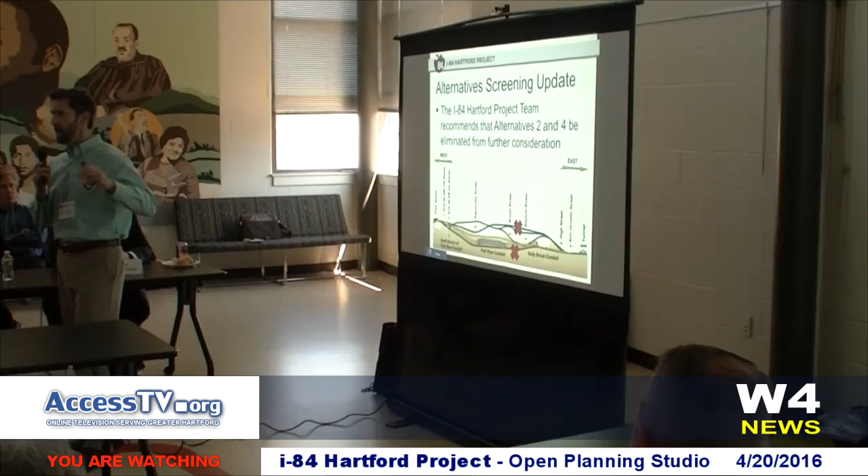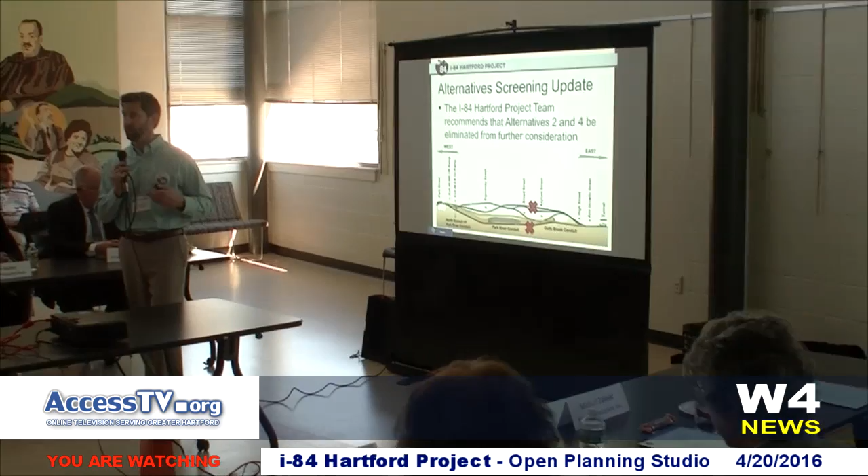So where are we on the screening? Well, we continue, and we've told you now for the last several months, that we really believe alternative 2, the elevated highway, and alternative 4, the tunnel, have some real challenges to implementation. We feel alternative 2 doesn't really satisfy a lot of the needs — I mean, it does replace the bridges, but it does not really solve our congestion and safety issues that we would really like.

Plus, it maintains structures that would have to be maintained over time, which is another issue that we're not thrilled about. The tunnel, quite frankly, ends up just being incredibly expensive. So our recommendation at this point is to remove them from further consideration.

I think we've been saying that, but it's a high-level decision. It's not our decision to make. We're basing that on our technical analysis. Federal Highway Administration needs to concur with that, as does the governor and commissioner, and those are discussions that are all ongoing.

I think alternative 2 actually may need to stay on the table. It depends, but it is the alternative that has the fewest property and building impacts. So we have to recognize if that's a big barrier to implementation, that's one that still may need to remain on the table. However, it's not a preferred alternative for all the other measures that we're looking at.

So the timing of this decision is a little bit to be determined. We know that it's in conversation, and it could happen in a week or a month, a few months. We're not sure yet. Again, it's very high level, and a lot of parties have to sort of come to that agreement together.

But what do we think we can do? Well, clearly we can continue working on this lowered highway alternative. We haven't had any real objection to this. Most people feel like it addresses a lot of the goals, objectives and purposes of the project. But there still needs to be work done, and we're continuing to refine. And we talked to you about capping options, and those are still possibilities. So those are things — various segments of the lowered highway, can they be sort of tunneled in effect? And that's something we're going to continue to explore.

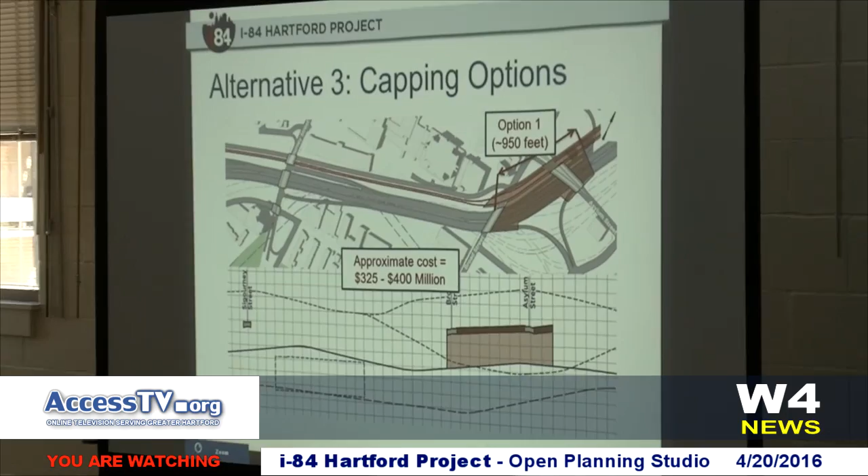Dave, Tim, do either of you want to go through this? There's a little bit of a recap from what we talked about last time, but there's also some new ideas we want to share with you.

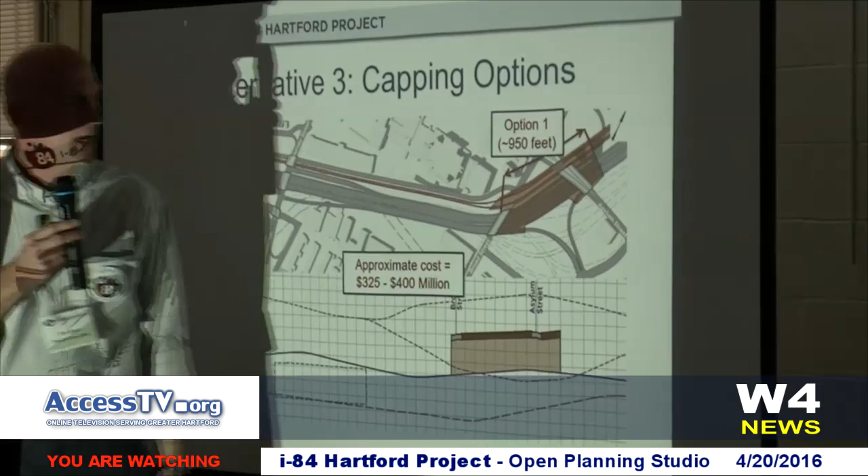So we introduced this capped section at the last PAC meeting. I know we always present a lot of information, so sometimes you need a refresher. We always talked about the connections north-south and how important they are, and also east-to-west, from the Asylum Hill area down into downtown—that's always been critical to the project, really trying to enhance those north-south connections.

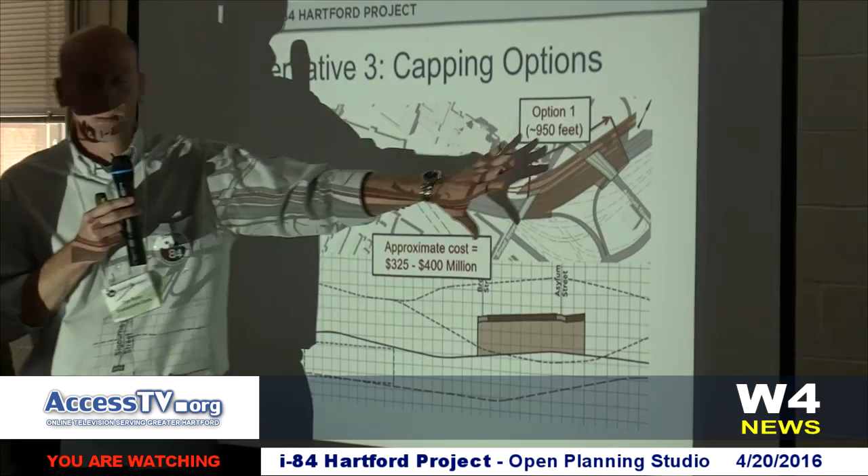So this is an area where we think a cap makes a lot of sense. This is one segment right here—about 1,000 feet and about $300 to $400 million for that one cap section.

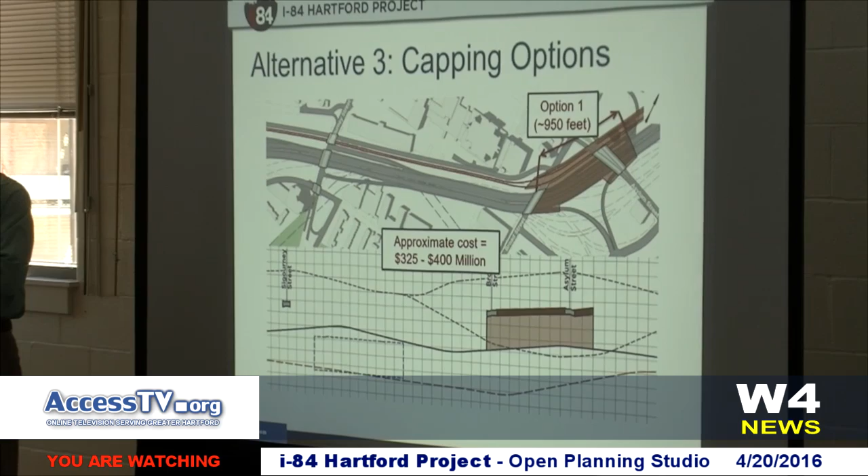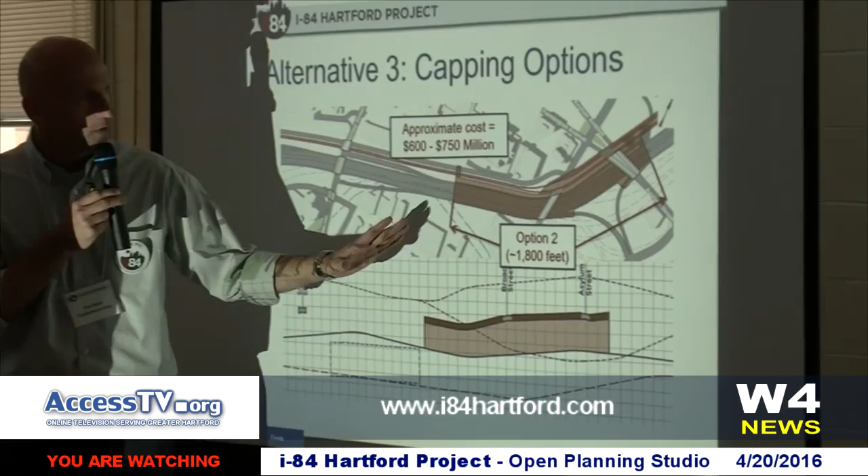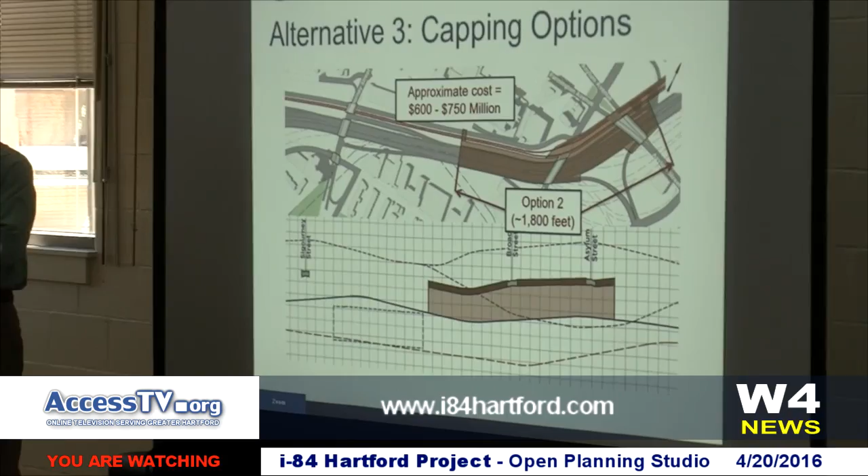Then we took it a step further and started inching towards the west to see what other possibilities were. So for this scenario, we have the original cap, and then a second cap that goes towards the Park River conduit—the longest cap we could put on the west without impacting the conduit. We've done research and know relocating it could be difficult, challenging permitting-wise, and there are other structural challenges. So this would be one other section, combined now at $600 to $750 million.

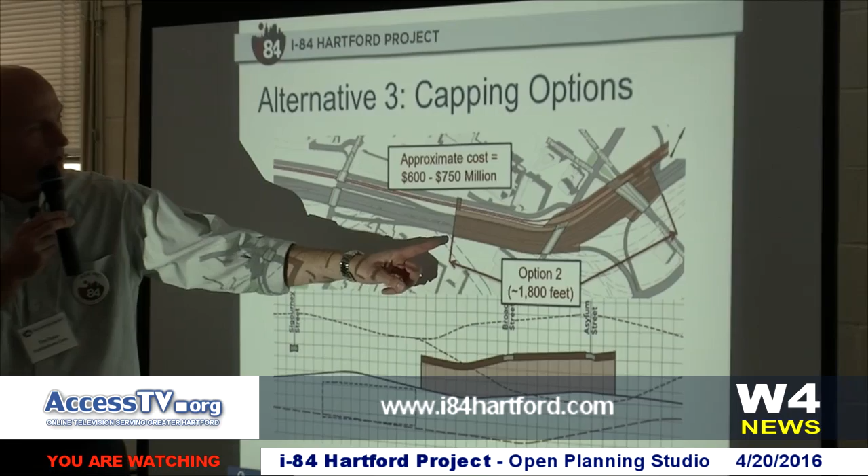And then what north-south connection do you gain? Possibly you could have a connection over the railroad tracks and then go down to Flower Street. We presented this to Aetna a couple of weeks ago. So that's one more iteration.

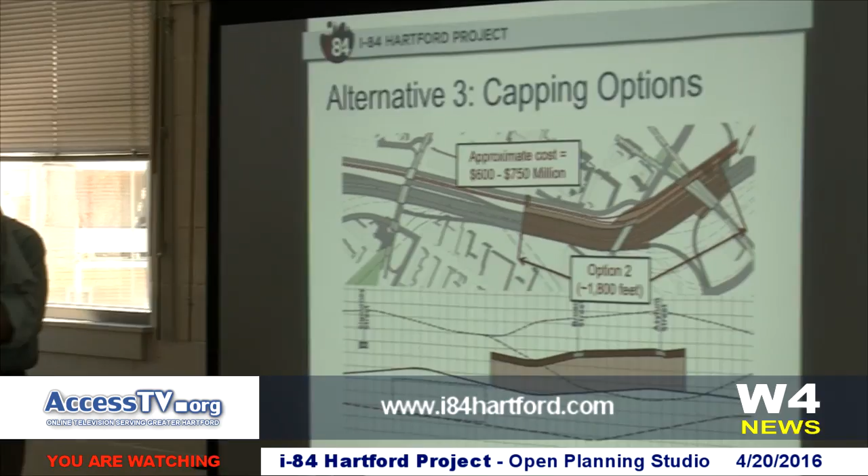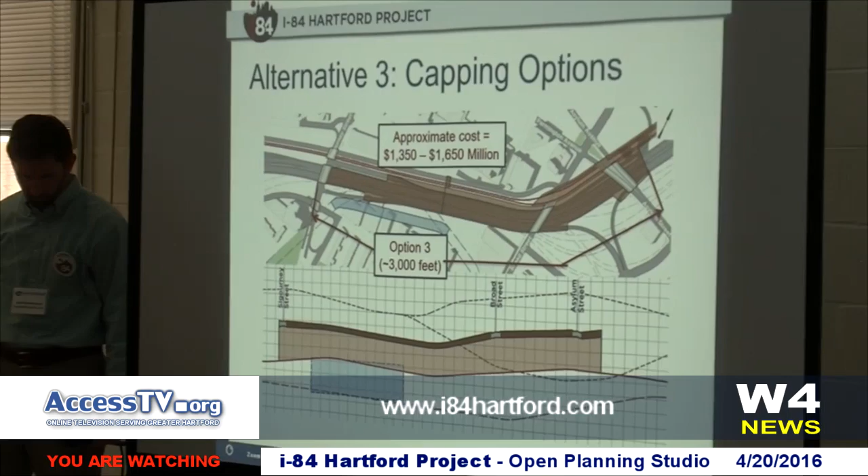And then taking it all the way to Sigourney Street, now you have this nice east-west connection all the way to Sigourney. We know there's a bike path on Sigourney that we could connect to—some kind of linear, off-road connection that's not there today. But the anticipated costs are 1.3 to 1.6 billion now, because we're capping over the entire highway—it's a lot of structure, and it would be in somewhat of a raised section.

So then taking that from Sigourney Street going west, we were asked to look at options west of Sigourney—could that be capped, what would that look like—and we started to lay that out. So now we have a section, this would be Laurel Street. This is with the lowered highway alternative, one of our options on the west, from Laurel Street to Sigourney. Yes, we could structurally put a cap over the highway—that's something we can do.

And then we started to look at some benefits, and we need to discuss that more, maybe with the urban design working groups and the ped-bike working groups, to see what the value is of that one. So about 250 to 300 million.

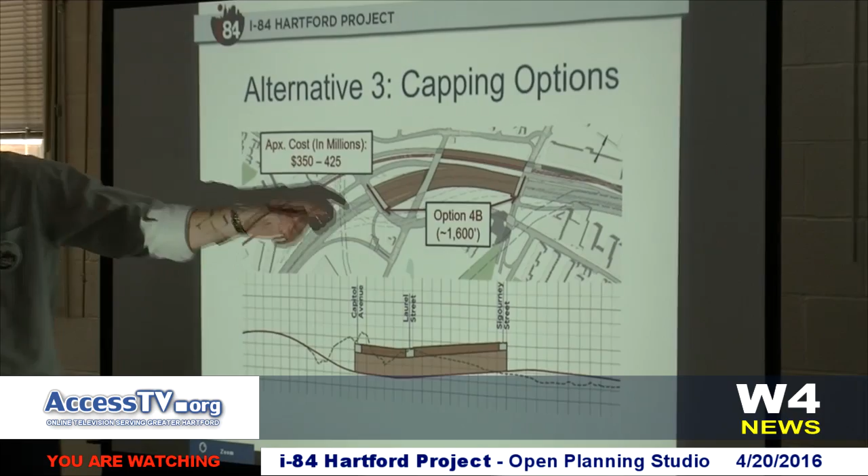And then the last segment is from Laurel Street, this relocated Capitol—Laurel Street would be above, Sigourney would be above, Capitol would be above, so you could connect those. But now the issue is it would be sticking up out of the ground, not at ground level, so there'd be almost a wall there with the cap section to support the deck—basically you're building a bridge above ground, a very long bridge.

So we just started to look at this, and we'll have more. We'll add to it and research more, but this is just some possibilities.

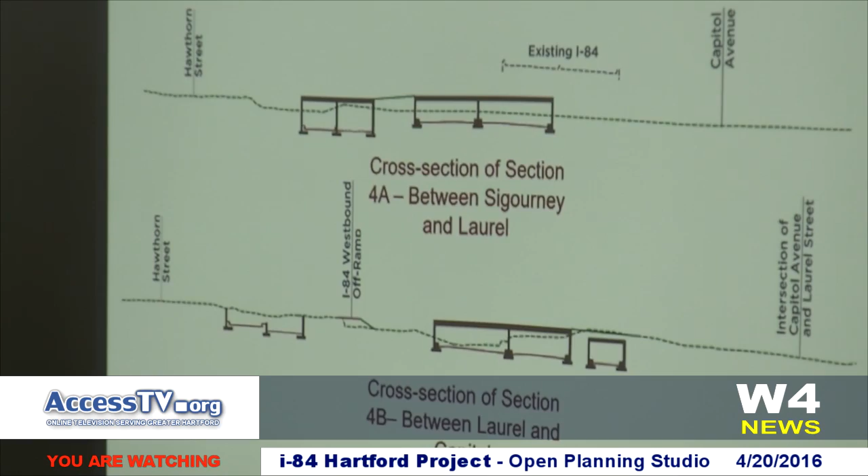So why were we even looking at this in the first place? Well, again, to try to achieve many of the benefits of the tunnel without the really extreme cost.

We felt that we do need a better east-west connection through the corridor. Right now, that's pretty limited. This is a good way of really integrating all of the various urban design features: land, development, open space, environment, kind of contributing positively to the economic health of the city. That's obviously something that's very important at the city level. And of course, shielding the highway noise and the sight of the highway from the neighborhoods.

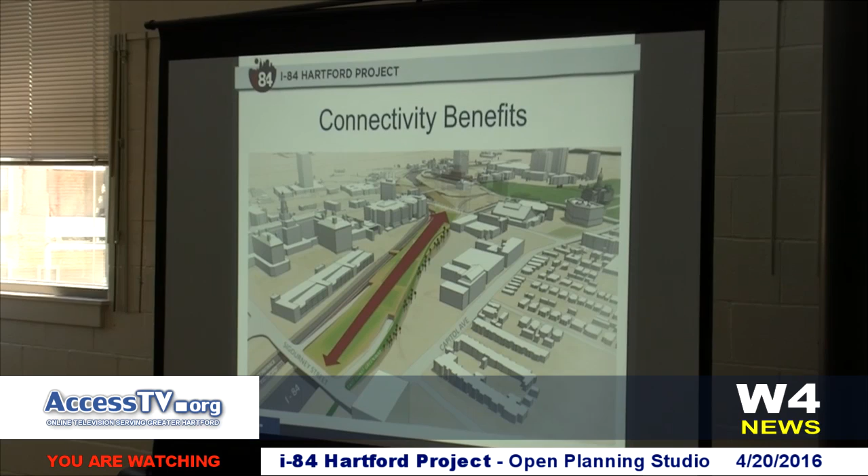So what are the benefits? This is exactly the kind of thing we're still trying to assess. We're truly trying to understand, does this give everybody what they want? Largely, it's an east-west connection. We've had discussions with the city and many people, and we're sort of still amazed how many people really feel as if this cap is going to give people free access across the highway.

We have to remember there's a railroad and there's a bus rapid transit facility there. So there's still a trench. There's private property on both sides. This isn't going to be a real easy thing to cross.

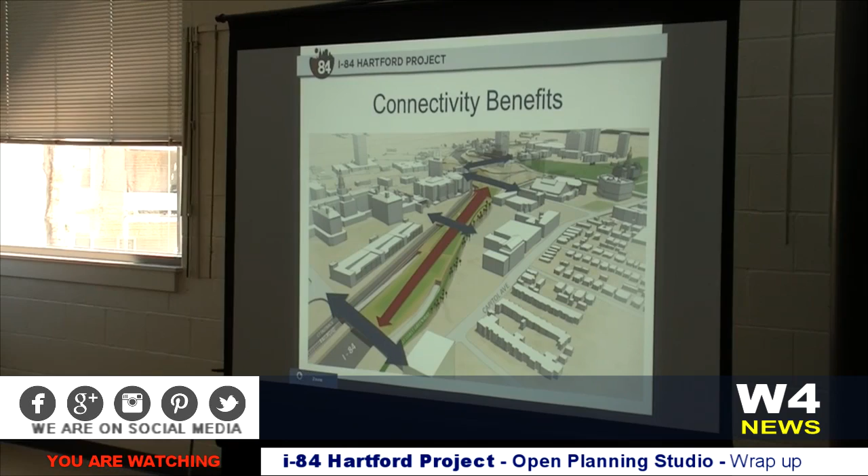The crossings largely occur where they currently exist—that's Sigourney Street, Broad, Asylum. Those are the existing cross streets that you drive and walk through each day. We have an opportunity to rebuild these wider, better, so they don't feel like just auto bridges. That's something we're going to be working on over the next several months to really show you how those could look and feel.

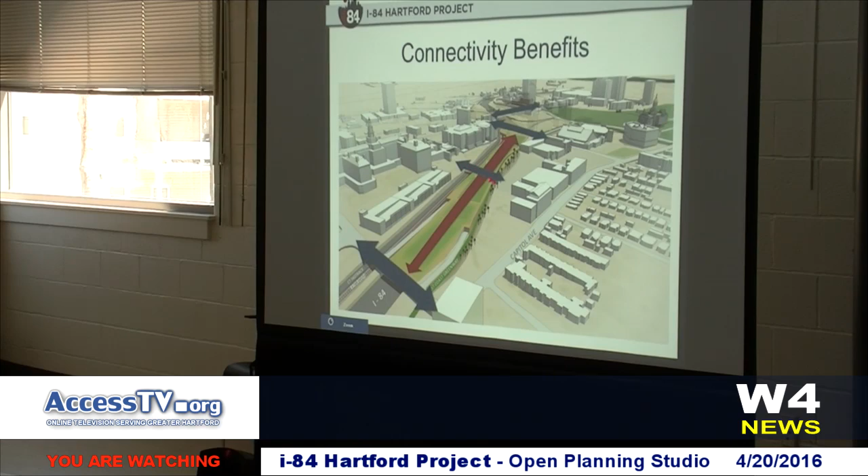But it does give us an opportunity to maybe, as Tim said, bridge this area across from the Aetna campus, bring people to Flower Street, improve those connections. So it's largely an east-west connection. I just want everybody to remember that, because I think a lot of us forget that there's still a significant barrier to crossing and connecting north-south neighborhoods.

Still expensive—$400,000 a foot. You think about that, every foot's $400,000. It's a lot of money. We're still looking at the benefit-cost ratios to see what makes sense, because of those five different segments Tim showed you, some of those probably do make sense from a benefit-cost perspective. Some of them maybe don't.

If we have to move the conduit, for example, it's going to be incredibly expensive. And what do we get for it? That's really what we're trying to ascertain.

So we're asking ourselves, are there other ways to minimize the highway's impact? We know, and we've been saying this since back at the Hub study, that the section between Broad and Asylum is really probably the piece that gives you the biggest bang for the buck. It connects the Asylum Hill and downtown areas. It's a limited cap, but it has some real air rights development opportunities. We've shared that stuff with you in the past. So that's probably something we would really like to continue to work on in the project.

We're just trying to see if those other segments have as much impact. The rest of it—what could it be? Early on there were some visions of economic development, townhouses, other types of buildings. Likely that cap wouldn't be developed in a way that would support structure. Air rights development is incredibly expensive to build. There's probably not a market here in Hartford for that. It would be a very, very long-term prospect.

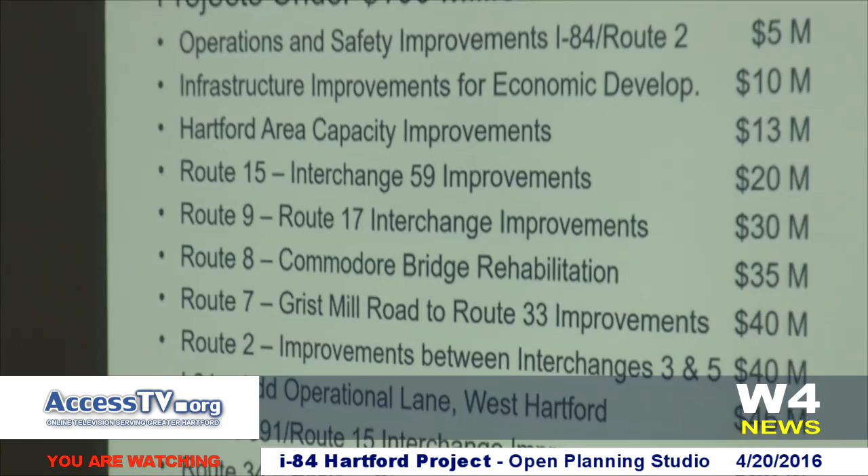Let's Go Connecticut, which is the state strategic plan, has a lot of unfunded needs. What you think $1.5 billion could actually buy in terms of strengthening our transportation system statewide is really impressive. These are all the projects under $100 million that the governor would like to fund, but unless the state comes up with the money, are probably going to go unfunded.

Between $100 million and $1 billion, again, a dozen or so projects. And you can see, when you talk about transportation and our ability to move goods and people, these are important projects—interchanges, missing links in the state highway system.

Here's several more. And then there's the mega projects, the ones that are over $1 billion. Ours is on there—again, this isn't a project that's funded at this point. We have Waterbury, the Mixmaster, which has significant problems—$7 billion, even bigger project. So there's a lot of needs out there. And we have to put that all into perspective when we think, is $1.5 billion something we want to spend on a cap?

So we continue to ask ourselves, are there alternatives to capping? We know there's partial capping opportunities, we just shared that. Can we do the same thing with noise or visual walls to block the highway's impact? Landscaping, berms, vegetation. And the latest thinking is, what can we accomplish with this East Coast Greenway, this linear pathway we've been talking about? Can we achieve some of the same benefits with that?

I'm going to let Mitch actually talk to you about this piece because some of this material I don't think many of you have seen yet.

Thanks, Mike. So this work, the ideas that I'm going to show you literally started on February 26th, the day after the last PAC meeting. Thinking about how we can make east-west connections through the city, connect neighborhoods, screen the highway, in a cost-effective way, but also appropriately scaled and achieving the goals of a tunnel and a cap. So these are still very new ideas. We're excited to share them with you today and look forward to your feedback on them.

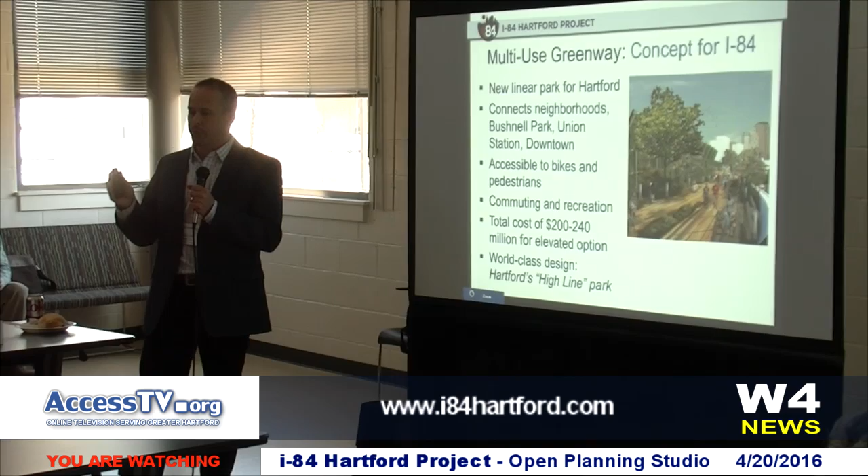Initial cost, order of magnitude cost estimate for this from Bushnell Park to Sisson Avenue is about $200 to $240 million, and that would be in the elevated option.

So what I'm about to show you are a couple different scenarios of how this greenway could work through the corridor. One is elevated, and one is at grade.

And lastly, what I think is important to impress is that we're really seeing this as world-class design. A lot of people have talked about the High Line in New York City as kind of a landmark project, a landmark public space project for the city. We think that this should be particular to Hartford if this is the direction that's chosen, but that the design quality of it should be to that level, to be that standard of high quality design.

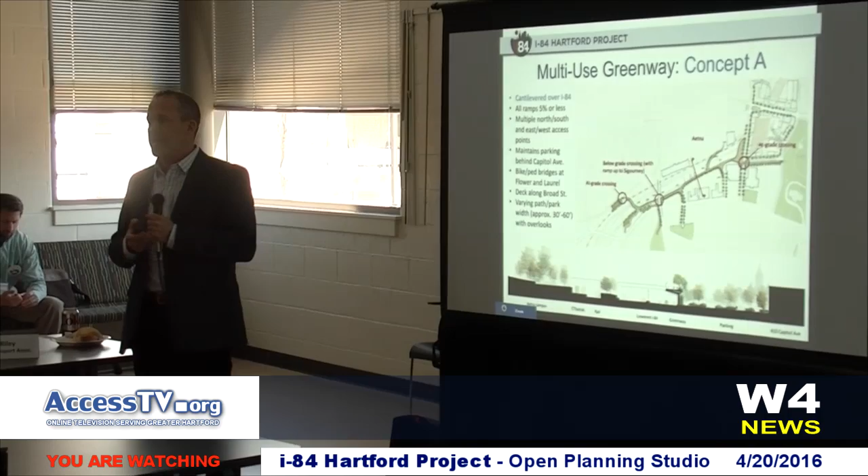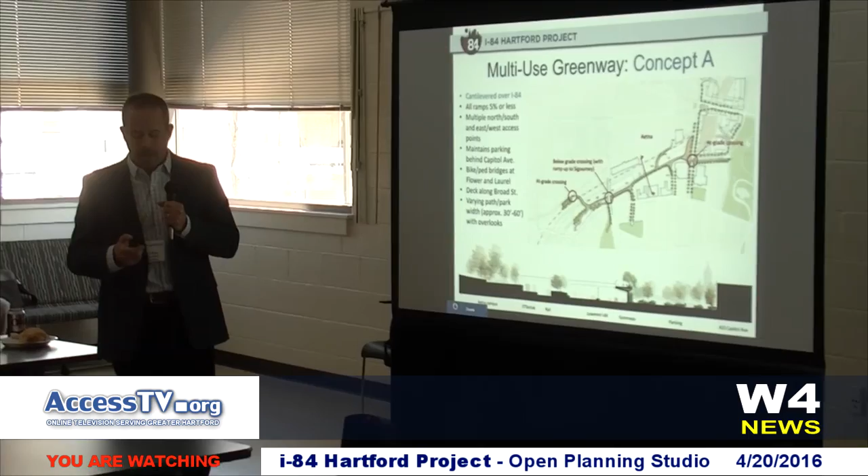I'm going to show you three concepts, A, B, and C, and these are also on the boards off to the side there. And again, this is really just showing the piece between Bushnell Park and Laurel here. To the left, it would extend all the way to Sisson Avenue.

But what this shows is an elevated greenway that begins here, the deck on Broad Street, and really the capped area between Asylum and Broad. So in each of these scenarios, you'll see that the cap is included at Asylum and Broad, which then flows into an elevated greenway system between Broad and Sigourney.

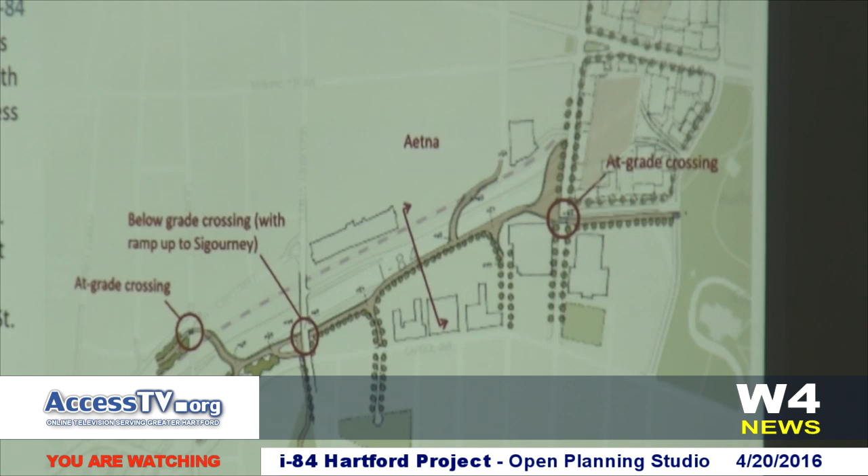And it would be alongside I-84, elevated. You can see in the section here at the bottom, in this scenario, it's cantilevered over the highway lanes, over the eastbound highway lanes. Really an elevated park. It would make connections to Aetna to the north and Flower Street to the south, so that Flower Street connection could be put back in some kind of way, shape, or form with a ramping system that goes up to the greenway, over the highway, and then to Aetna and Flower Street on the other side.

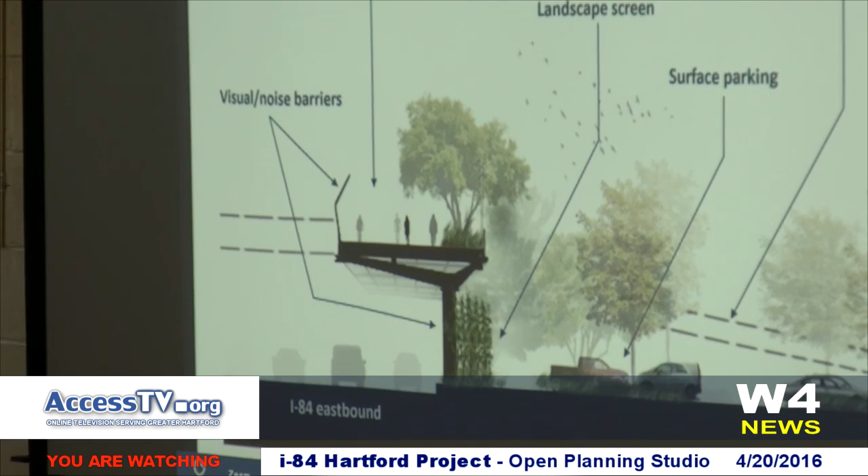This is a zoom in of the section of what that would look like. Importantly, what you're seeing here is the elevated greenway above the highway, but what's also here, integrated within the column structure of this greenway, would be a screen wall. And that screen wall could have landscape with it. It could be a number of different things. We really haven't gotten that far with the design of that piece. But what that does is it would screen the highway from street level along Capitol Avenue.

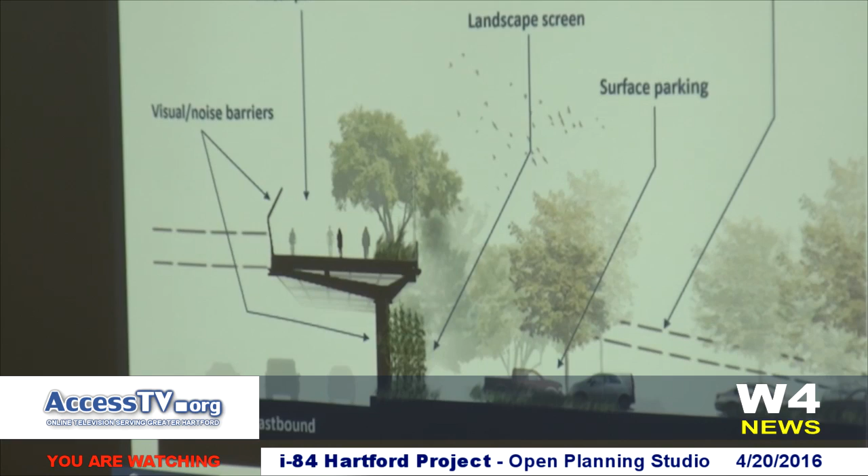So if you're standing on Capitol Avenue looking towards I-84 to the north, you would see this elevated greenway. You'd see wall and landscaping. You'd basically see an elevated park in your view. And we have a perspective of what that looks like in a second. You can see the ramp dashed in down to Flower Street here, 5% ramp coming down to Flower Street, and then the ramp crossing the highway and going towards Aetna and Flower Street to the north.

This is concept B. It's basically the same concept of an elevated greenway, just slightly pushed to the south of the highway. You can see it here with a double structure and the zoom in of that section, again with the wall, visual barrier, noise barrier, underneath the elevated park, which is up here on top, ramps down to Flower Street and across the highway as well.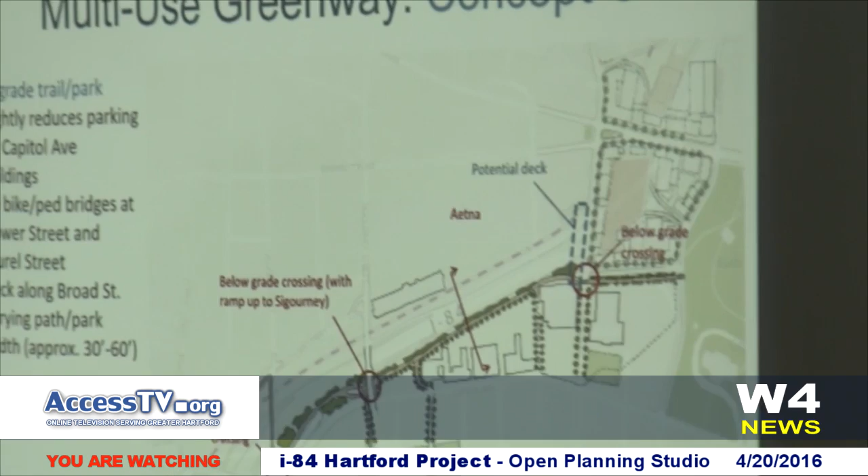And then concept C, we looked at how could the greenway work if it were at grade, on the ground, just coming through the parking lot, behind the Courant, into Bushnell Park, and extending to the west along Laurel Street. In all of these scenarios, we're talking about a width of probably 30 to 60 feet in terms of the linear park, and it varies depending on the condition it's going through in the urban environment.

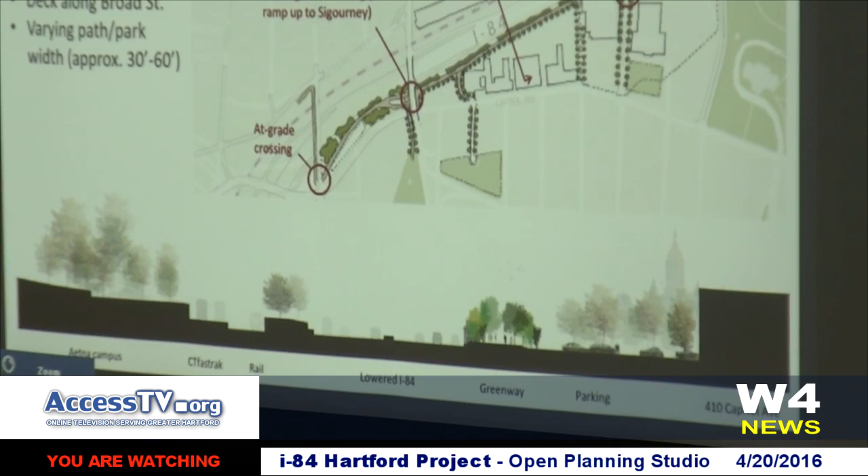This is a section of the at-grade park, again with the screen wall and landscape surrounding it.

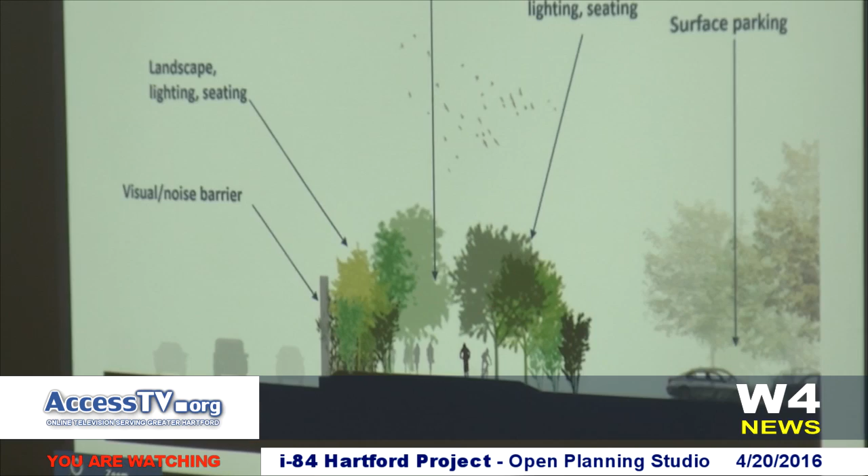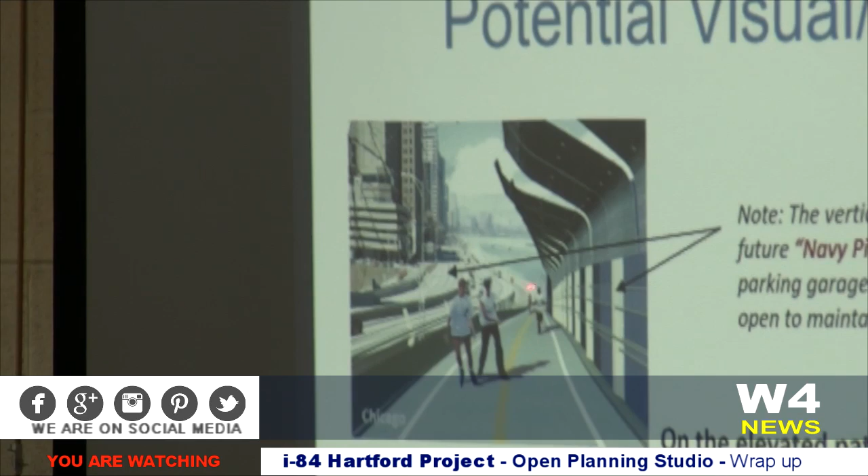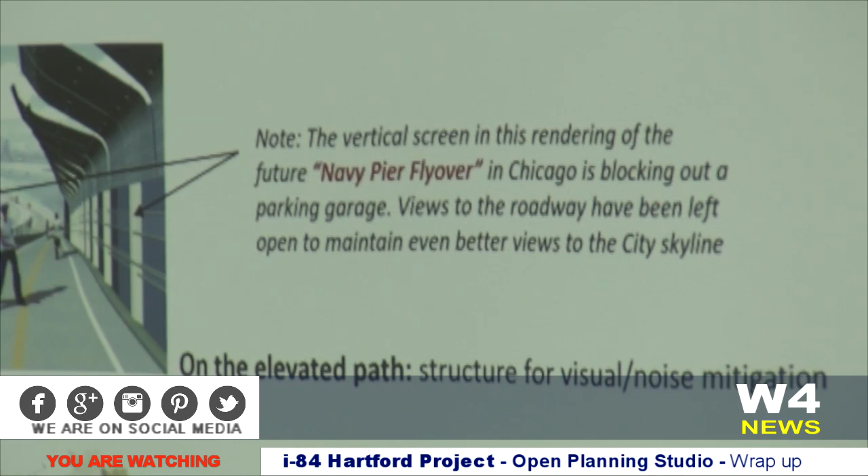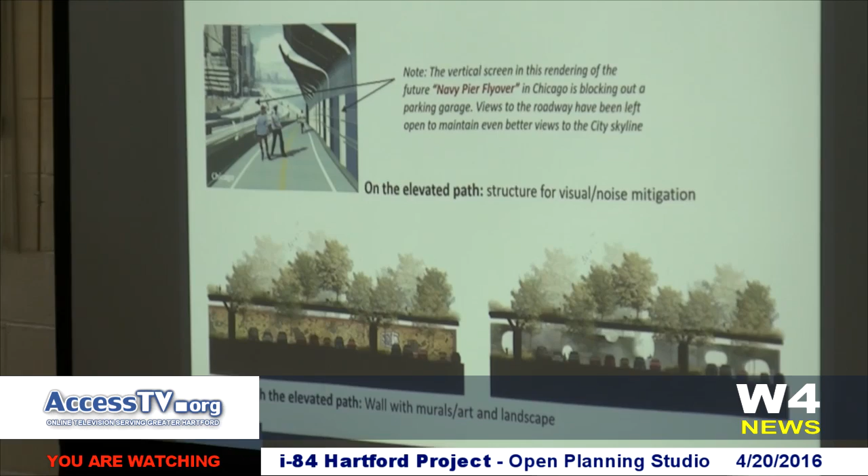We looked at some precedents, and we also gave some thought to how that wall could function underneath the elevated greenway. This is actually a project in Chicago that we found, called the Navy Pier Flyover, alongside Lakeshore Drive. This has similarities to what we're talking about. It's not exactly the same kind of context, but you can see this is primarily a bike path. There's no sort of park or landscape elements to it, places to sit. This is a way to get cyclists from one side of the Chicago River to the other side. But what we thought was interesting here is the kinds of treatments they're thinking of in terms of screening parking decks, screening highway, and screening noise. So we were intrigued by that image and did some testing of our own of what that could look like in Hartford.

This is the view that I mentioned before, as if you were standing at the intersection of Capitol and Broad Street as a pedestrian. You've got the parking lot of the Courant in front of you, and you're looking towards the Aetna building here. This is Flower Street, and this is the ramp that would go up to the greenway, the multi-use greenway, East Coast Greenway. And this would be the greenway itself, this yellow line coming through on structure with a green wall, landscape, and other types of treatment that would block out the highway behind it, because the highway behind it is now at grade.

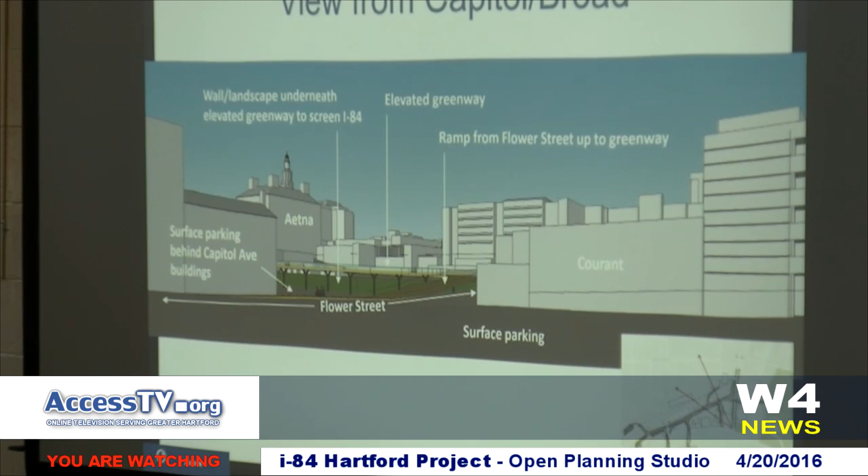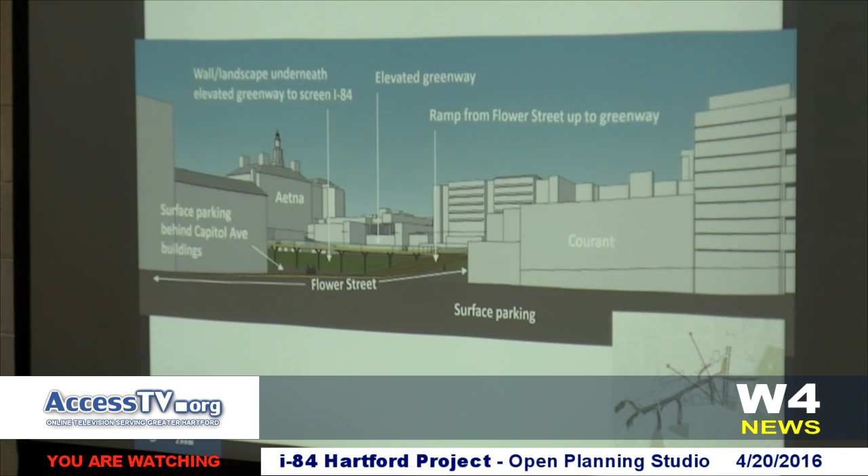This is the lowered highway option. One other thing to point out about this diagram is that the East Coast Greenway, or multi-use greenway, would not be strictly flat. It would actually have some up and down movement to it to relate to the ramps that are coming up to meet it. So the grades are being worked out in terms of 5% slopes and things like that.

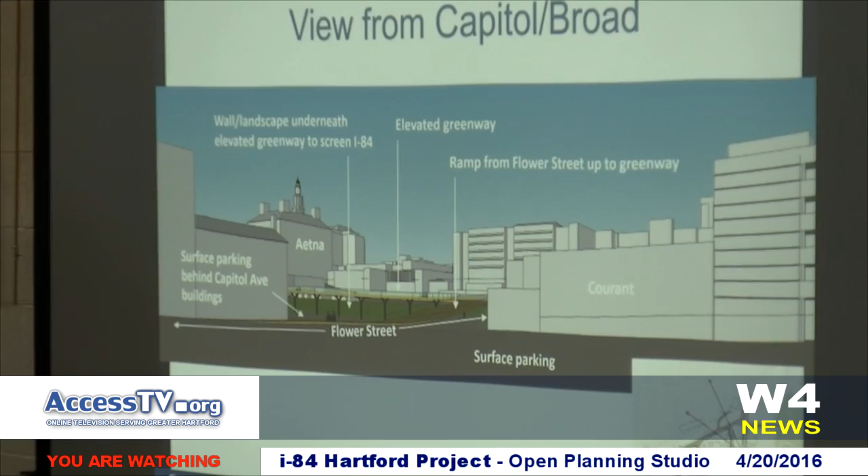And this is just a conceptual view of what that linear park could look like. Very early on we made some assumptions about what the materials would be, what the quality of this would be. But again, we're trying to imply that this is a high-quality design, like the High Line in New York City.

It's moving people, it's pedestrians, it's bikes, it's connected to lots of different neighborhoods, and really envisioning some of the urban design or transit-oriented development elements I was talking about earlier, at one end of the line facing Bushnell Park, really making those strong connections through the corridor.

And these are other precedents, other images that we found to be relevant or compelling for this idea. One is actually in Hartford over I-91, that kind of corridor. This is the High Line in New York City. There's another project in Chicago called the 606 Bloomingdale Trail, a very interesting linear park north of the city. We think that has some elements that could be applied here as well.

Mitch, when we show this graphic again, what does this do in terms of connectivity? It does pretty much the same thing the capped highway does, giving us that strong east-west link between Sigourney and Bushnell Park. We still have the crossings north-south to contend with, and we'll be working on making those very strong crossings, but they'll all be going over the highway. So we can get the same connectivity benefits with the trail that we could with the capped highway.

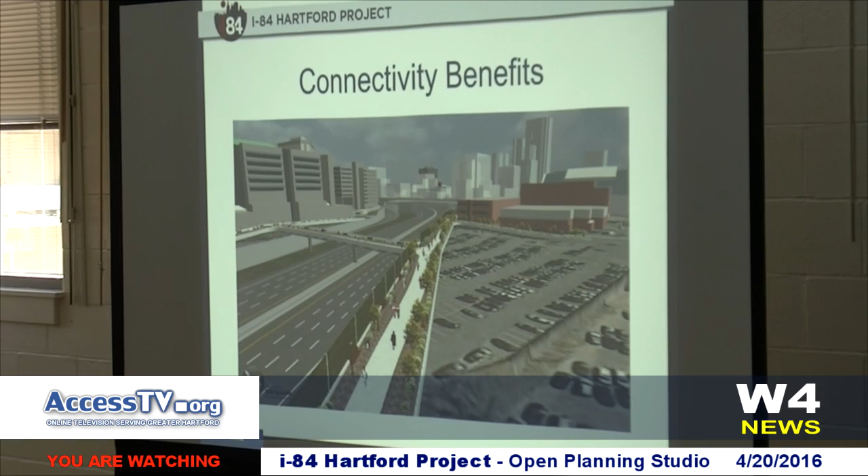This is a screenshot from the model that Nick and company in the back are going to be demonstrating. You can actually get a look at this trail from lots of different perspectives and angles, so visit Nick later if you want to really see what this looks like in the model. And there's that crossing to the Aetna and down to Flower Street, one potential alignment. It might not be that straight or look exactly like that, but it gives you a sense of how to reconnect that missing piece that disappeared when Flower Street was closed.

I think a lot of you probably are wondering why we're spending so much time at these meetings on urban design and bike-ped connectivity. I think we're at that point in the project where we have an alternative that satisfies the traffic needs, the safety needs, the structural needs. We've worked out a lot of the details. We continue to model and test, of course, but we're maximizing everything we can do on the traffic side.

We're getting down to the local system now, the local streets, understanding what they need to look like. How do we move people in other ways? How do we integrate development? These are the pieces that are now becoming a real emphasis for our project team, and they will continue to be over the next several months until we reach a preferred alternative. Rest assured, we haven't stopped on the technical analysis for the other stuff—it's just that this is what we're really focusing energy on now, as we've spent a lot of the time up front on some of the real pressing purpose and need items from our project statement.

So at this point, I think, Dave, we have some surveys and things that you want to quickly update everybody about?

Okay, thanks, Mike. Yeah, we've been working on a few things. One of the things I want to talk more about is we've had a lot of people ask us, you know, this is how I travel today—I get on the highway here to go from home to work, this is how I go back home. With our alternative analysis, with our new alternative, how will I go for my new trip?